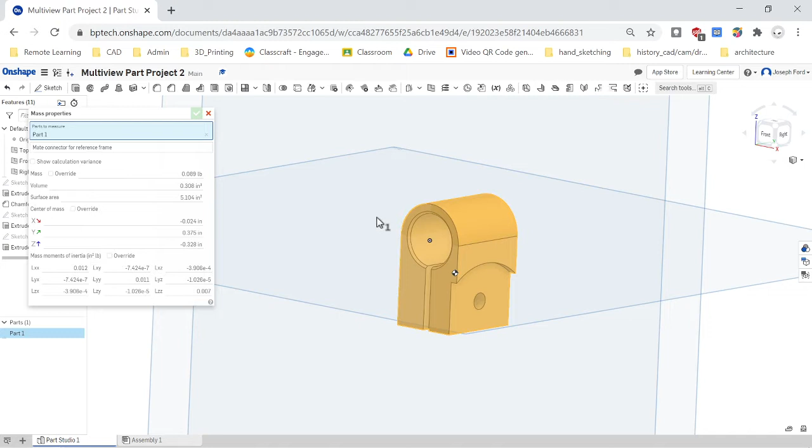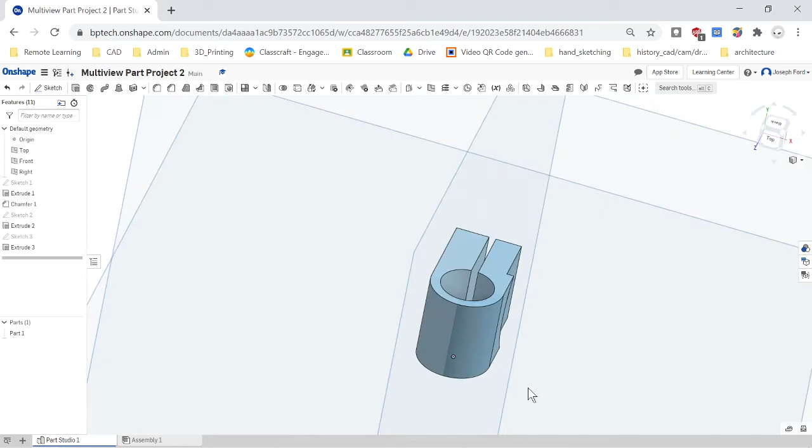Okay, so now we are going to create a drawing out of this coupling, and I'm going to go over how to best do that. This is part multi-view part project 2, and now we have created our part. We are going to create a drawing out of the part. Since I have created this as my front, this as my right, and this as my top, I should in fact see that when I create my drawing.

So I'm going to go over here, insert new element, click on create drawing, and let's take a look at what else we have.

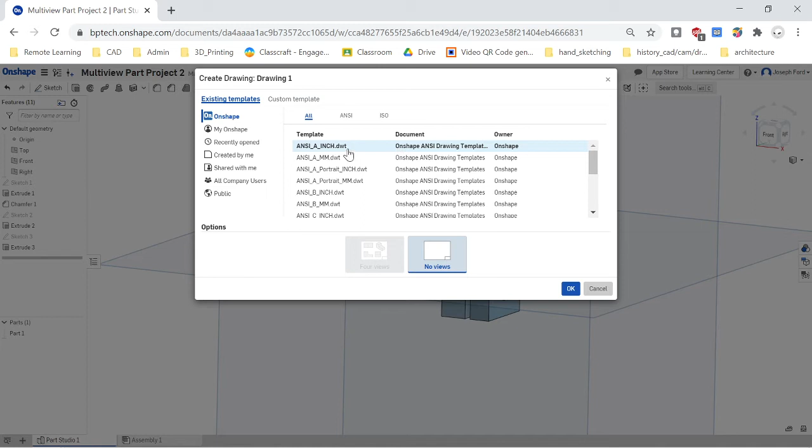It was in inches. A is the regular size. Portrait would be if you wanted the view to be in portrait form, but A is a good size because it is a small part, and we'll actually probably be able to use a 1-to-1 ratio on it. So that is good, and it will create our drawing for us.

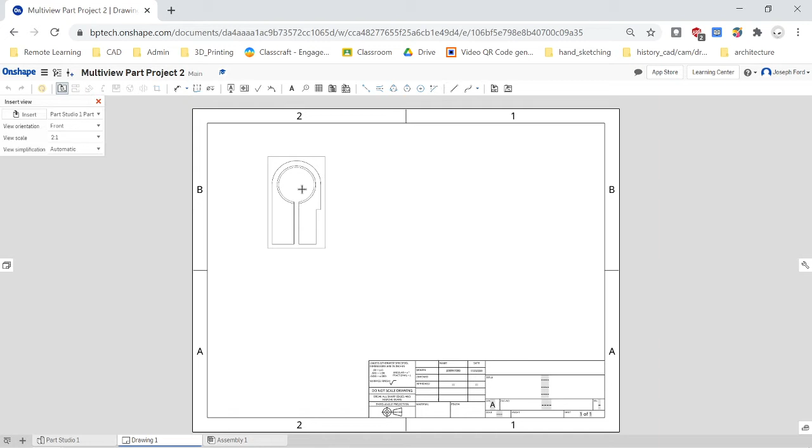We may in fact want to blow the size up. It might be a 2-to-1 rather than a smaller part scale. So yep, the scale right here automated to 2-to-1 because Onshape is smart like that.

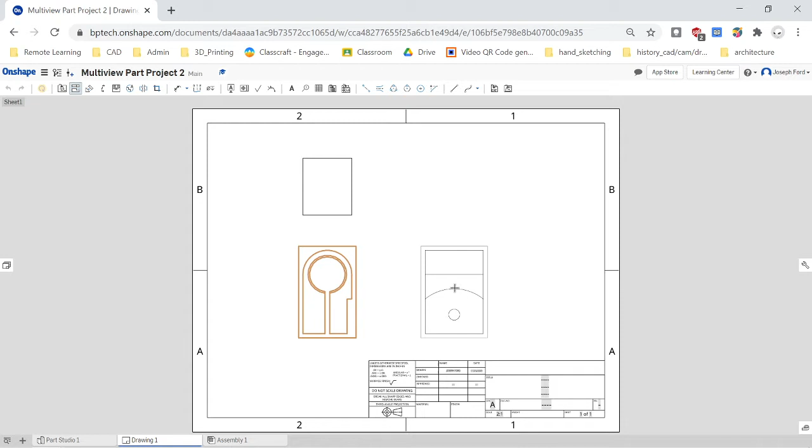We are going to start with our front view and then move up from the front view to create our top view. And then we want 3 views, so I'm just going to select this again and move out to the right side to create our right view.

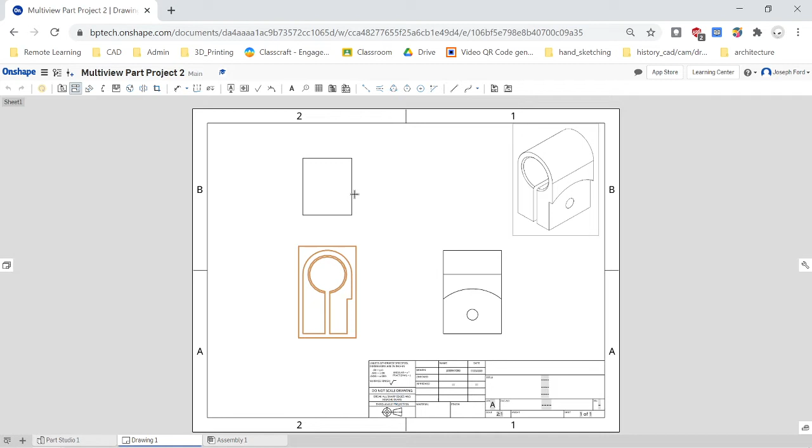This is fine, but I like to include an isometric view in my drawings in the corner. So I'm just going to sneak that up there, and I will have my isometric view of the part.

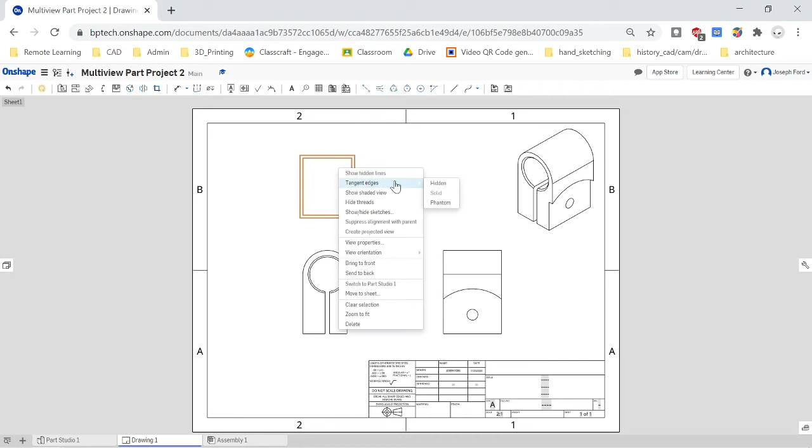So from here, I am going to show hidden lines because there are some cuts to this project that you might want to show. Especially on the top, when there's nothing being shown up here, I'm just going to right click on the top. Actually I first need to get out of that function. Right click on the top and show hidden lines. Now I can see a little bit more of what's going on here, and it just enables me to see the lines and how they connect.

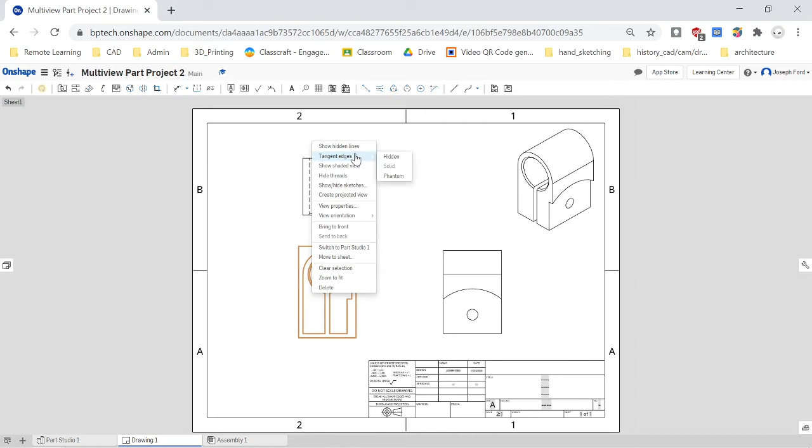I got my channel, and then I have my cutout circle. That looks good, and you can display hidden lines on this one as well. Just right click, show hidden lines, and then I'll see my extended cuts over here, and that looks good.

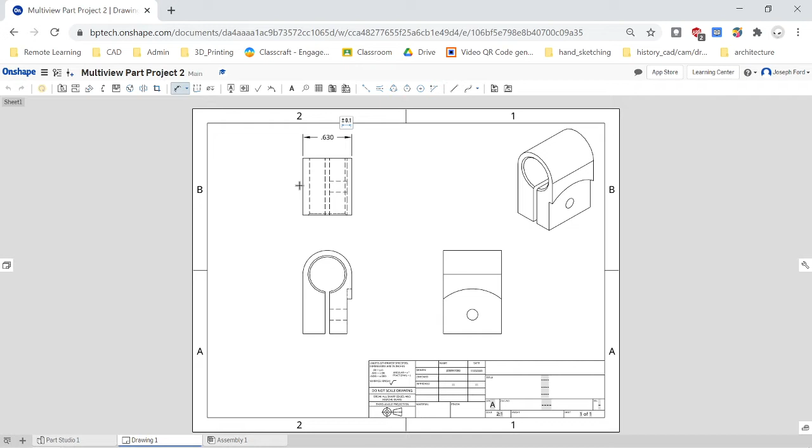So now I'm going to start dimensioning it out. With dimension, I'll get my sort of overall dimensions and try to keep them about the same. Notice how they're the same over here.

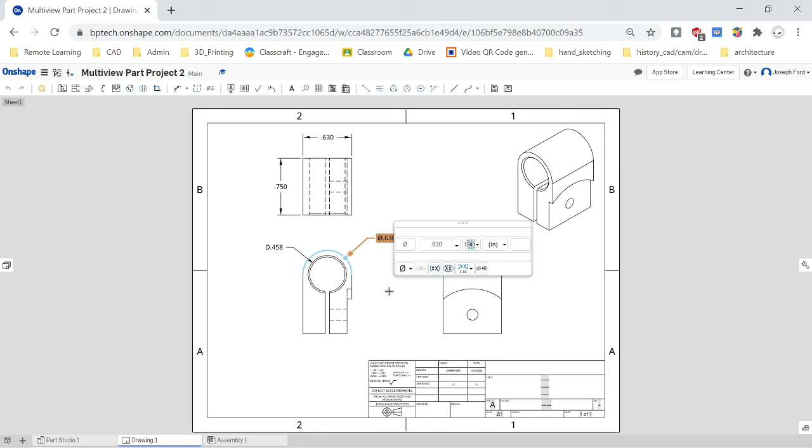And now I need to dimension out my radii. If I prefer a diameter, I can put in diameter. Click that toggle right down here, and it'll give me the diameters rather than the radius. I prefer that for this one too. Click on that, and it'll give us our diameter. That way it just makes more sense, right? With the diameters, it makes more sense here.

This, when I dimension it, I'll keep that a radius, and have it bump out to the side, that's fine. Trying to find a good spot for it. That looks good there.

And then with this though, I want to add some text in there because it's a hole, but I also know how far it's going to go, and that was 0.221, I believe. Let me just look that up quickly. And nope, it's 0.255, off on that, so 255.

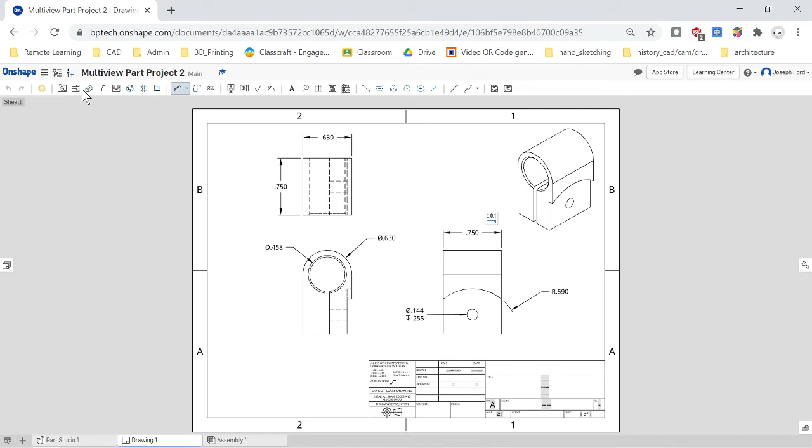And add in the dimension to the top. And I am going to put a center mark in here. Put the center mark in here. And then the center mark for the arc will be down there. So far so good.

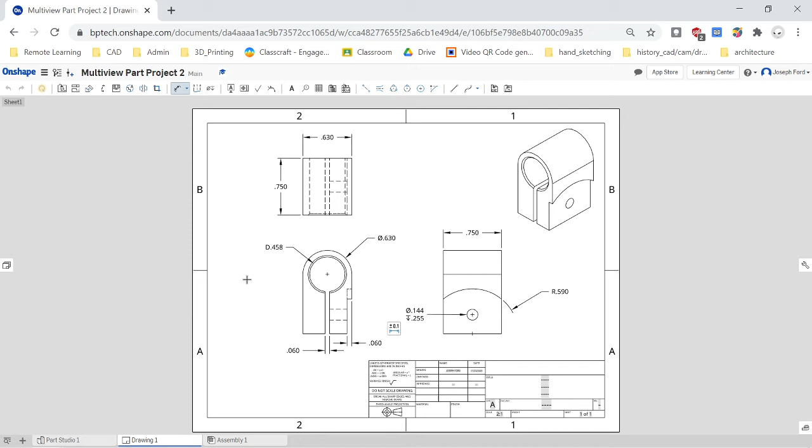Keep on adding some dimensions. I need to know the thickness there. And I need to know the thickness there. And the height. So looks good so far.

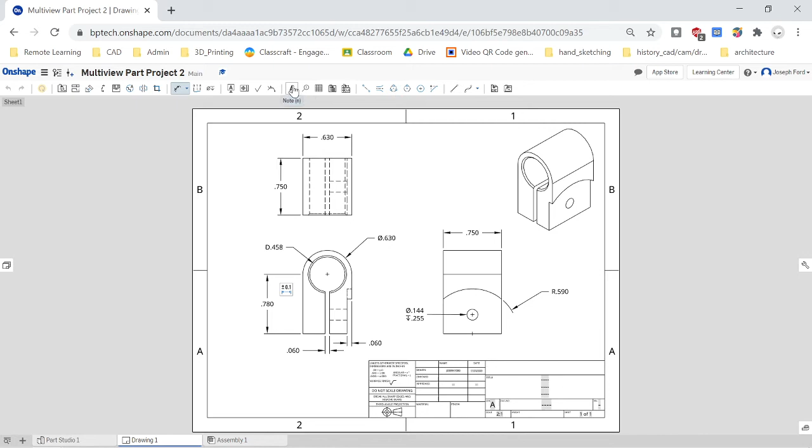And then I'm going to have to put in a note for my chamfer. So up here, a note, and the note is going to point to this chamfer. I'm going to say exactly what they said here, and it's 0.02 by 45 degrees. 0.02 by 45, and we got all of our symbols right there, degrees.

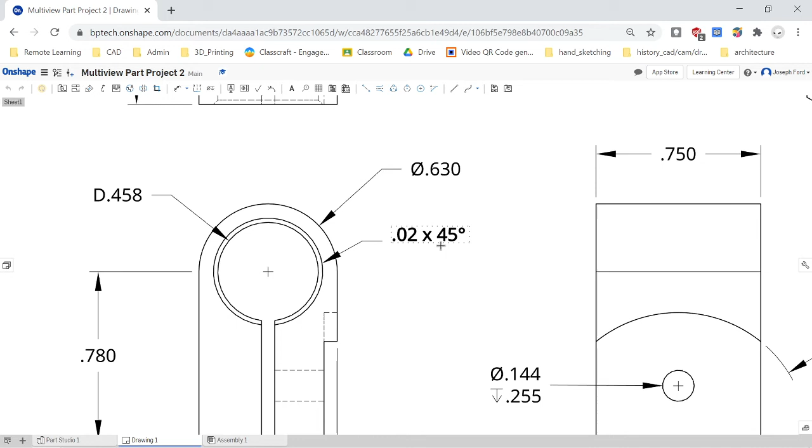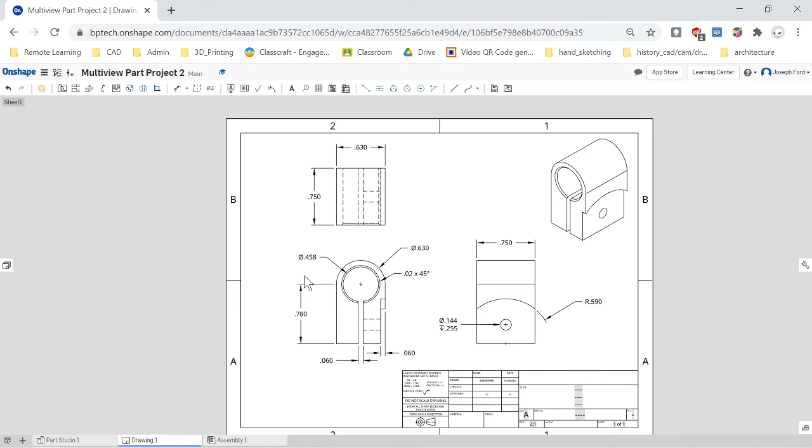And I can move this over, and I want it all on one line. So that looks good. I got my outside diameter, I got my inside circle diameter. I don't want that, I want the actual symbol. So the diameter symbol is there. Radius looks good, and I know that's my center point.

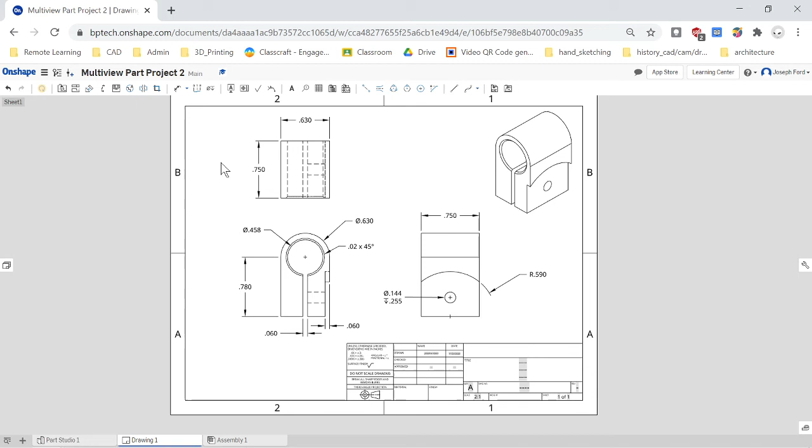0.06 for the cut, 0.06 for the channel. And looking over, it looks pretty good. Making sure I'm not missing anything. And I don't think I am. I'm just going to double check by looking at the dimensions that they have given me.

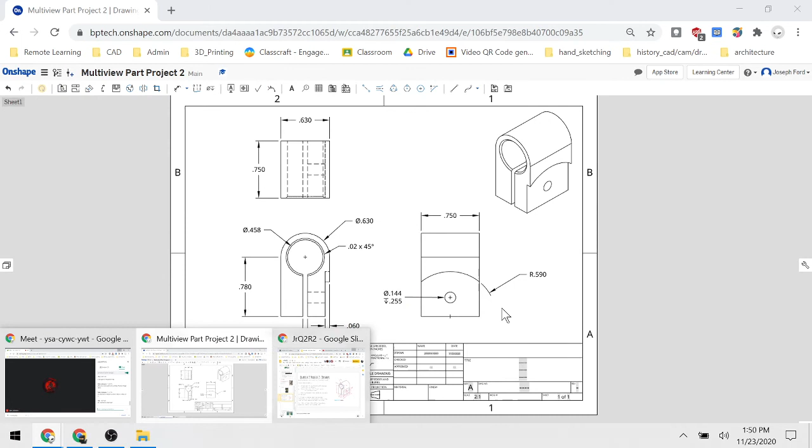The overall width, the two .060 cuts, .780 is the height, chamfer, 2 diameters, the radius on the right side, the height, okay, that's what I need, which I forgot. So the height of this, I'll just keep it within the part here, rather than get it confusing out here.

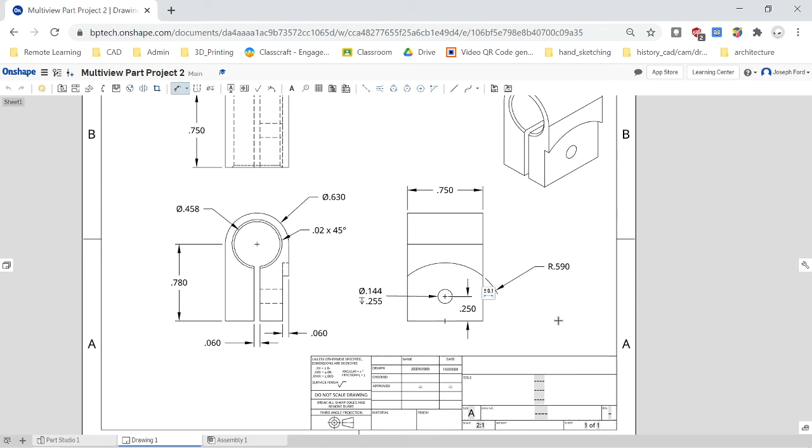I'm just going to keep it within the part. Just double check again. So I have the height, and now I need to know that it is indeed in the center. It is indeed in the center of my part. This is kind of assumed, but it's better if you have it in there.

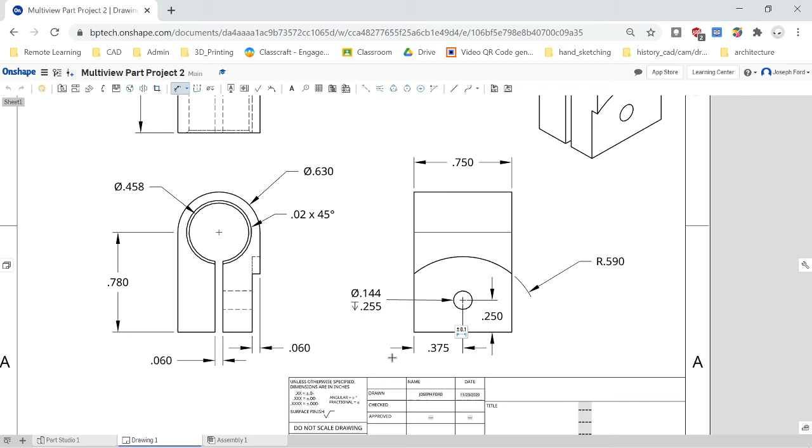So now, before I say we're all set, let me just check it out. Yep, and that is everything that we need to know.

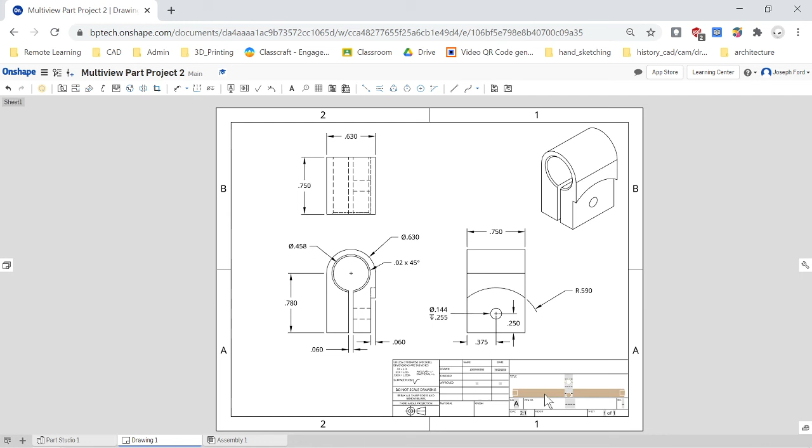So now we're just going to adjust the title block, and it should be pt.2, pt.2, and then the middle here would be CAD CAM.

Delete that. And then the bottom here will be multi-view part project 2.

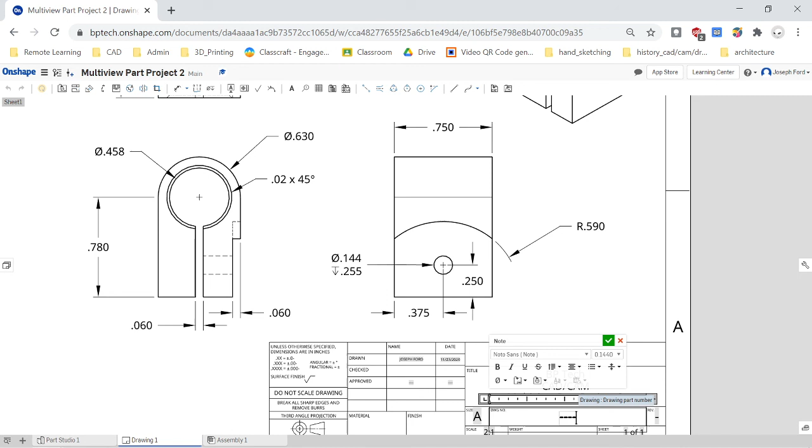This drawing number will be 02. The material we are using is A2 stainless steel, or A2SS. Check it off.

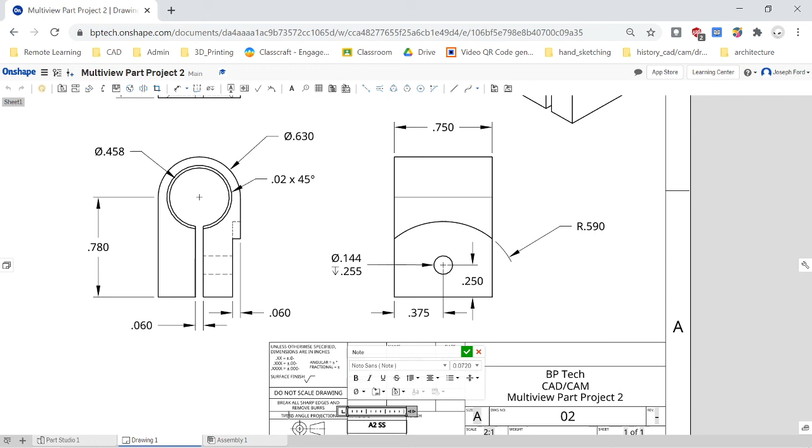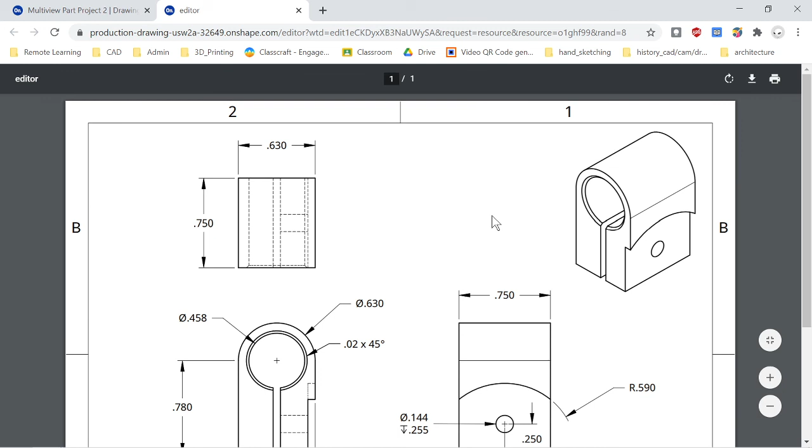And that's it. So to save it as a PDF, make sure you go over here, print, and then it gives you the production in drawing form. You can download it as a PDF, and then you can submit it that way. And that's it. Good luck.